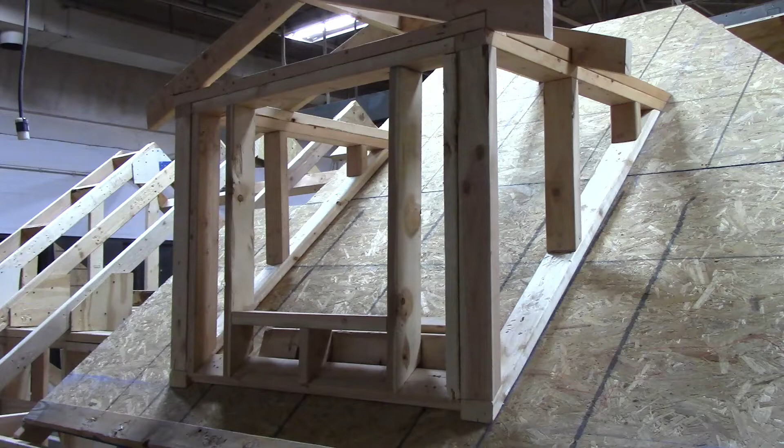Okay, so this is a picture of the front of the dormer with the window opening. So as you can see, you don't need a header in this window because it is not a load-bearing wall. So all you need to do is pretty much frame a window in there and you can install the window.

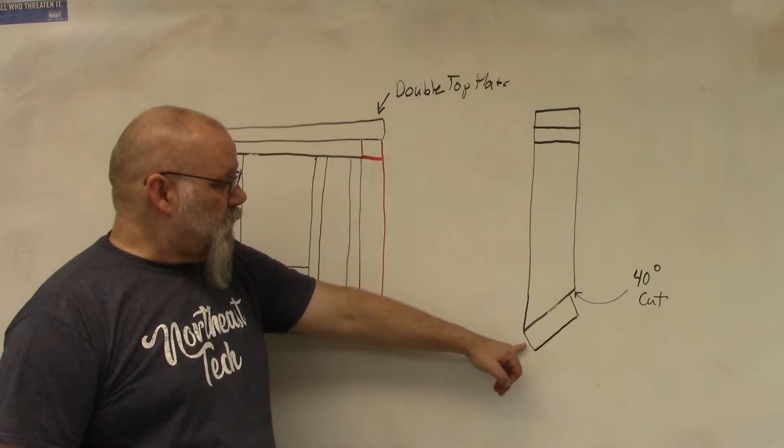Okay, let's talk about the front of the dormer. Alright, so to build the front of the dormer, over here you have your bottom plate right here. You can leave this unbeveled or you can bevel it and then it would come straight down. Most guys just leave it unbeveled and just line up this point, and this wall will be flush with the side walls.

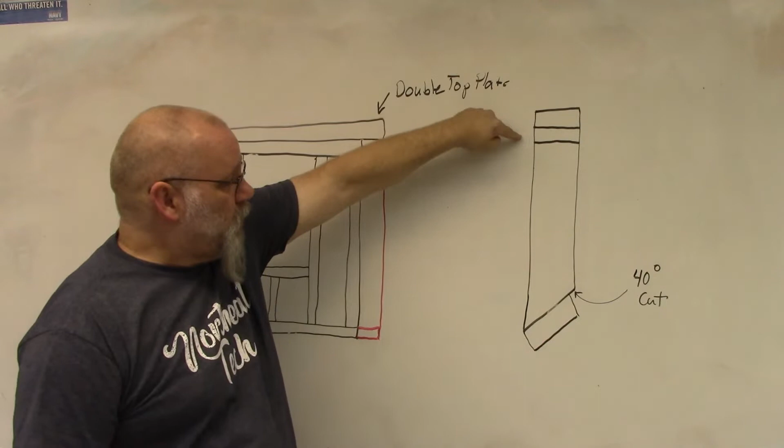Okay, then you got your double top plate on the top, and you got your top plate up there. So all you have to do is cut this angle the same slope as your roof. In this case we're using 40 degrees. So you cut those on 40 degrees. So this stud, this stud, this stud, and this stud will be on 40 degrees, cut like that. The wide part mitered. Okay, this and this are the two side walls that we built in a previous video, and I showed you how to make those.

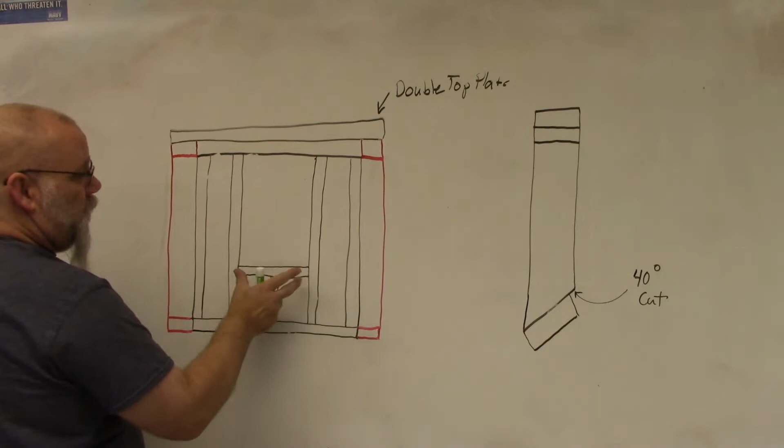Okay, now as far as the window opening goes, this is a non-load bearing part of the wall, so there's not much weight on here. So usually what they'll do is they'll use these two plates right here. That's your header. Then you just put a sill in here and frame it for your window. Like I said, it's not supporting any weight, so there's nothing pushing down on it. All you need is an opening for your window to go in there.

Okay? So depending on the size of your dormer, the size of your window, just box in whatever your window is going to be, and that's all there is to it. Okay? Now, let's touch on a couple things that you should do with the dormers to make sure that they don't sag later on. All right?

When you put the dormer on the roof, you have to make sure that they land on a rafter. If they do not land on the rafter, if they land between the rafters and they're just nailed to the plywood that's on the roof, the decking, you need to support them. All right? Now there's a couple of ways you can do this. Number one is you can run extra rafters up underneath there to support the weight, or you can do, like in a floor, you can run blocking.

Run blocking between the rafters every 2 feet, every 3 feet, whatever, 16, 32, 48 inches on center, so that it supports the side walls of the dormers. It is recommended when doing dormers that it is doubled all the way around. So both sides should be doubled, top and bottom should be doubled, so that it's sitting on something solid.

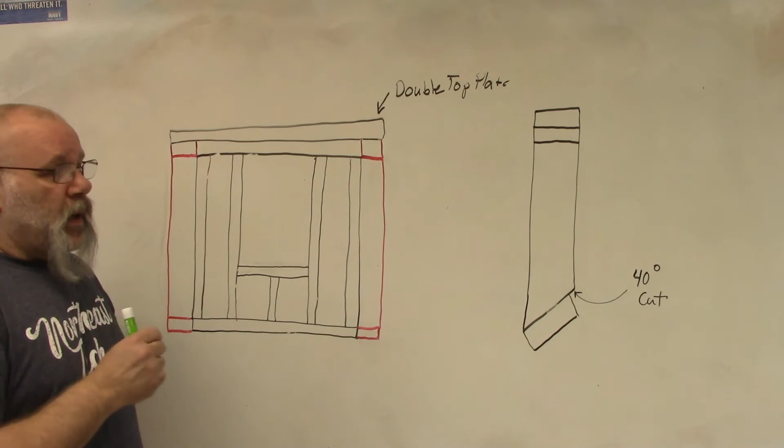So you can see that in my other videos. I show you how to do those types of roofs, and you can just add that type of roof on to this dormer. So this dormer will work for any of those types of roofs. Okay, so I was going to do a video on the roofs, but you can just look at other videos for that. So the first part of the two videos shows how to build the walls,

figuring them out on the ground without having to go up and measure stuff on the roof without any patterns. And then the second part is this one where you're just building the front of the dormer, which is a pretty simple task.

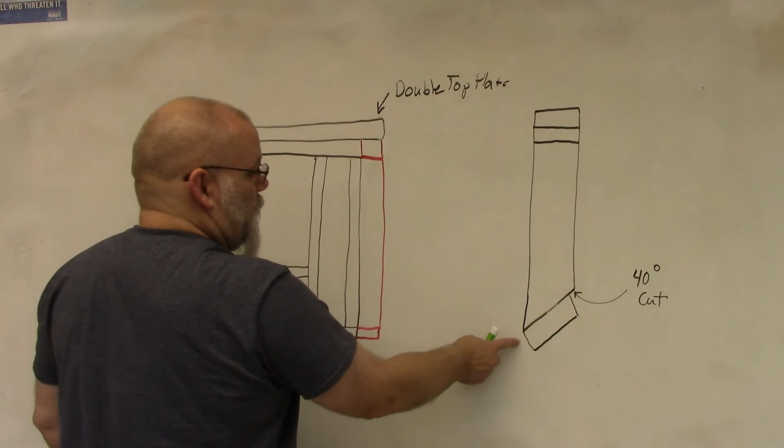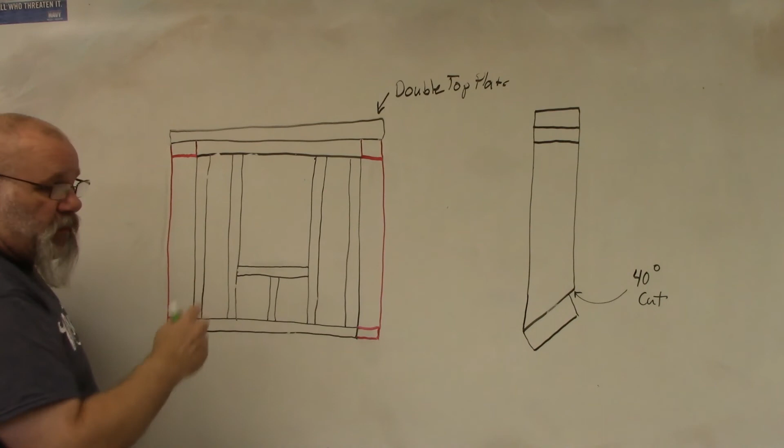So like I said, the bottom plate, cut your studs at the same slope, put a top plate on there. There's your top plate, put your 4 studs or whatever, however the width of your rafters is, cripple down here, sill in there, and you have a framed opening for a window. So that's all there is to building a dormer front where you're going to have a window installed.